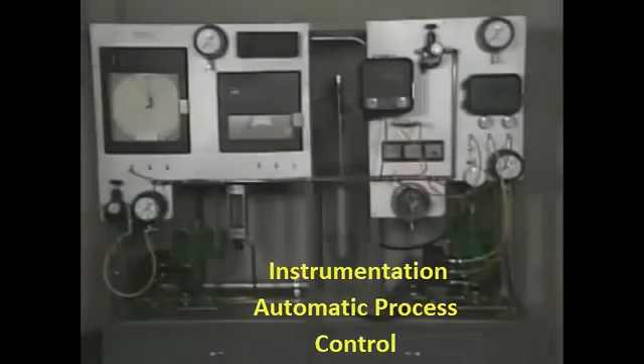In an automatic control system, a controller initiates a corrective action based on the difference between the signal it receives and the set point for a controlled variable. The various types of corrective actions that controllers can provide are called control modes.

With two-position control, a signal from a controller causes a final control element to move from one extreme to another, such as from on to off, or from fully opened to fully closed.

To see how two-position control works, let's look at an illustration of a sump pump arrangement. In this system, a pump draws water out of a pit or sump. A float with a rod is the sensing element in the system. The float rod has two collars, which serve as stops for a linkage that connects the rod to a switch. It's part of an electrical circuit that starts and stops the sump pump motor.

If the level in the sump rises, the float also rises, and the lower collar on the float rod pushes up the linkage to turn the switch on. This starts the sump pump motor. As the pump draws water out, the level in the sump drops, and the float moves down. When the water reaches the minimum level, the upper collar pulls down on the switch linkage, shutting off the pump motor. Now, in a two-position control system, a certain amount of change can occur in the process without causing a control system response.

This amount of change is called the dead zone. The dead zone in this system is controlled by the positions of the two float rod collars. The dead zone can be reduced by moving the two collars closer together. A smaller change in level will then turn the pump on or off. But even though the water will be maintained at a more constant level, the pump will turn on and off more frequently, and this overuse could damage the system's components.

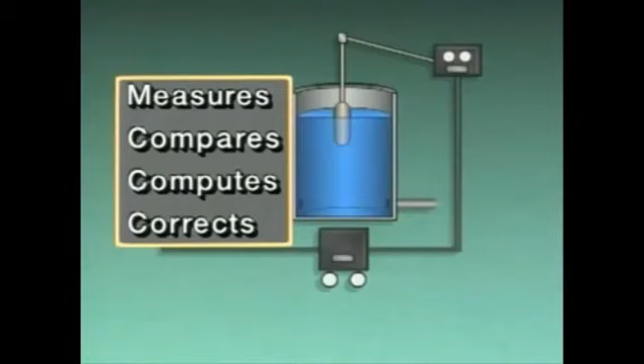The controller measures the signal, compares the signal to set point, computes the difference between the two values, and produces a corrective output signal that's proportional to the input signal. The controller sends that signal to the final control element in the system, a control valve.

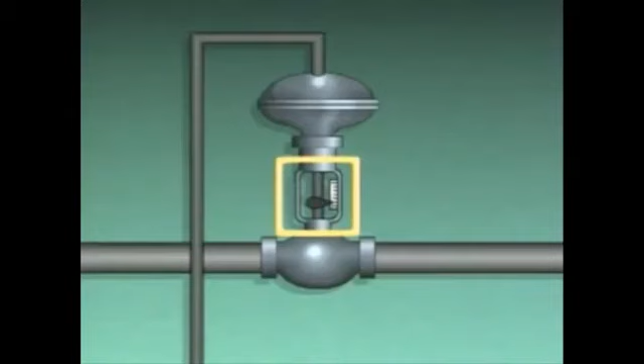The control valve responds by closing down to decrease the flow of water to the tank. However, because of process characteristics such as resistance, capacitance, and dead time, the level fluctuates before it finally returns to set point. We can tell more about how the temporary change in water level affected the system if we plot the control signals on a graph.

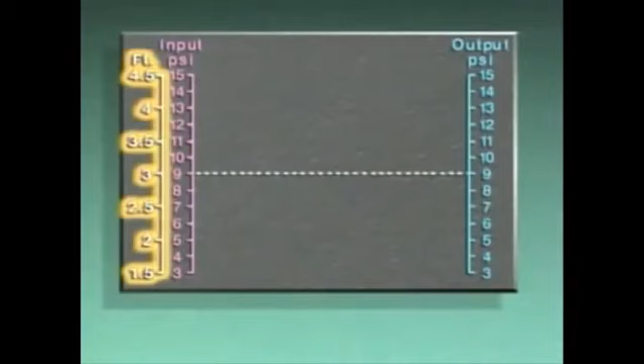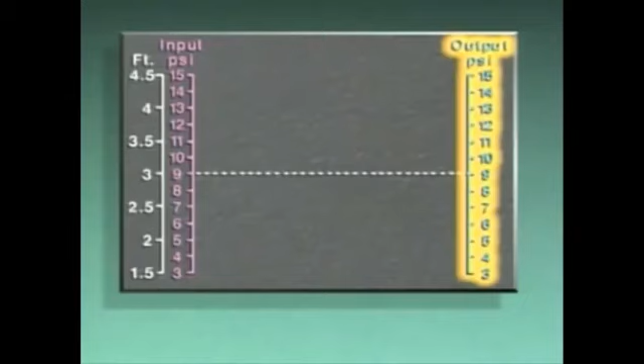On the graph, the scale on the far left is marked off in feet to indicate the water level in the tank. The next scale indicates the value of the input signal to the controller in pounds per square inch, or PSI. The scale on the right indicates the value of the output signal from the controller. It, too, is in pounds per square inch.

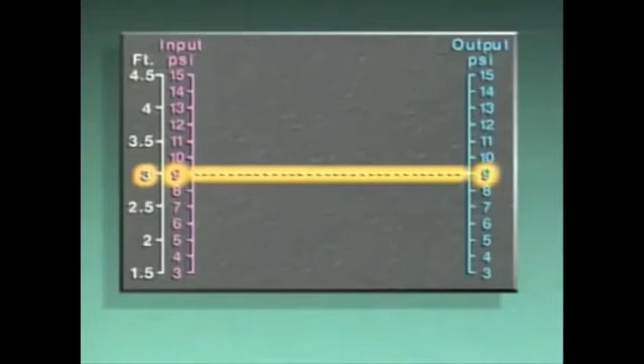As the level in the tank fell, the input and output signals decreased accordingly. However, the process characteristics that we mentioned caused the signals to go through several fluctuations or cycles before returning to set point. With a temporary disturbance, process conditions return to their original state. So a proportional control system can normally return the controlled variable to set point.

But if a continual disturbance occurs, a proportional controller may not be able to restore original conditions. For example, this graph shows the input and output signals when an ongoing decrease in demand caused the level in the tank to rise.

In this example, the control system brought the process back under control. But when it did, the level stayed higher than the original set point. That's because the input signal to the controller increased, then stayed high because of the continual disturbance. As a result, the proportional output signal stayed high as well.

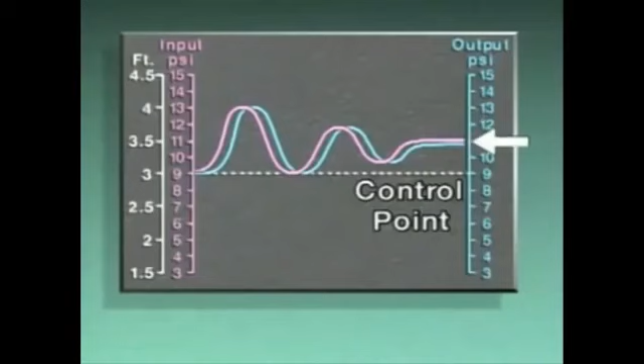The higher steady-state value that resulted, that is, the higher level that's represented by the input signal, is called the control point. The difference between the variable's control point and its original set point is called offset. Offset occurs because a proportional controller produces only enough output to bring a process back under control during a continual disturbance. It may not produce enough output to overcome the disturbance and return the process variable to its original set point. In some processes, a proportional controller may not return a process variable to its original set point. In other words, the controller's action may result in offset.

However, a controller adjustment can sometimes be made to change the amount of offset. This adjustment affects what is known as the proportional band, or PB. Proportional band is the amount of output change, or delta output, in relation to a given amount of input change, or delta input.

The proportional band value is usually multiplied by 100% so that it can be expressed as a percentage. When a controller's input change and output change are equal, the relationship between the signals is 1-to-1, and the proportional band is 100%. This condition is called a 100% PB. The input and output signals on this graph show a 100% proportional band.

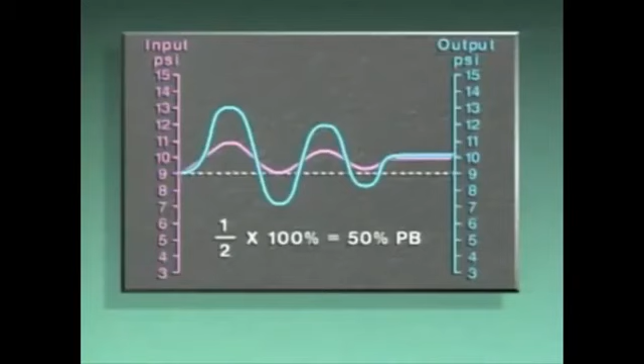Now, the signals on this graph show a proportional band that's less than 100%, otherwise known as a narrow proportional band. With a narrow proportional band, a small change in input to the controller produces a larger change in output. This relationship is equivalent to a 50% proportional band, since 1/2 times 100% equals 50%.

With a narrow proportional band, control action is rapid, and the value of the controlled variable stays closer to set point. However, decreasing a proportional band setting increases the amount of cycling, which can overwork system components.

Now, the signals on this graph show a proportional band that's greater than 100%. This type of proportional band is called a wide proportional band. With a wide proportional band, a large change in input to the controller produces a smaller change in output. The proportional band for this example is 200%.

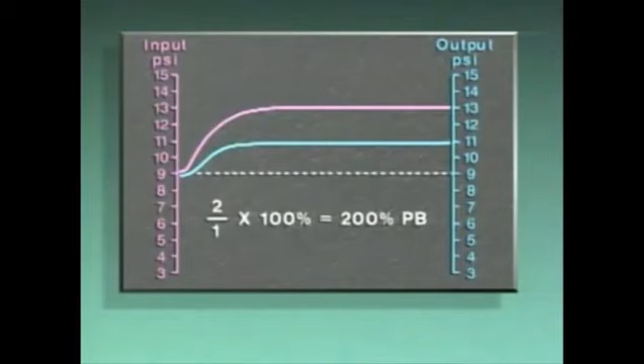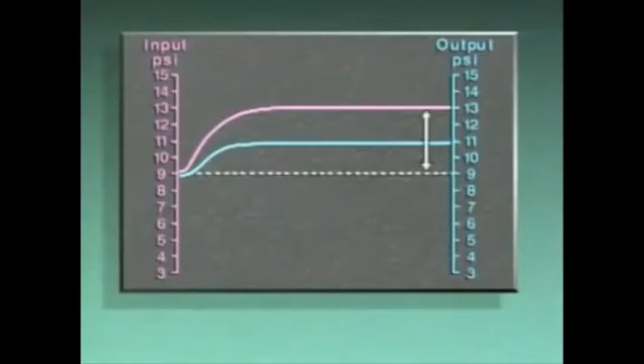Since the output signal changes less than the input signal, a wide proportional band can minimize the amount of cycling in a system. However, there's more offset with a wide proportional band.

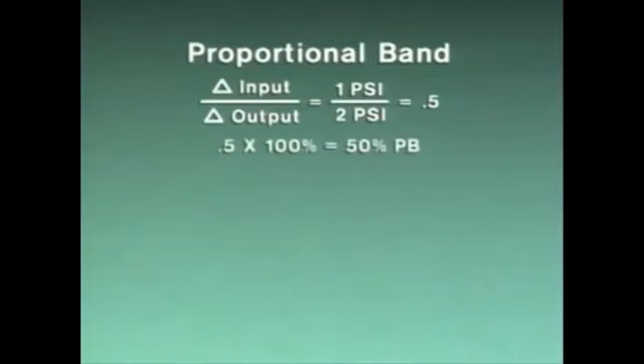Some manufacturers use the term gain when describing a proportional control adjustment. Gain is the inverse of proportional band, and it's expressed as a quantity rather than as a percent value. For example, a 1 psi change in input that produces a 2 psi change in output represents a 50% proportional band. But since gain is the inverse of proportional band, the relationship between the change in input and output is reversed. So the gain in this example is 2.

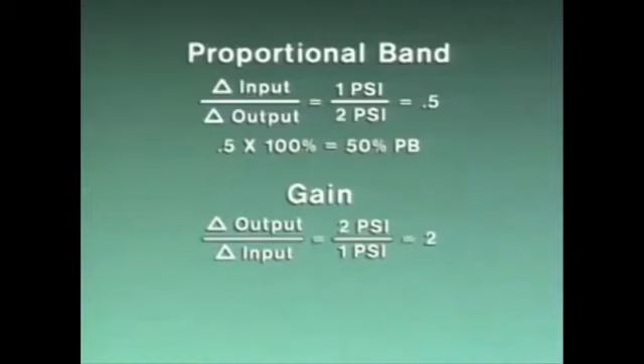In this topic, we examined two-position control and proportional control, and we looked at how those control modes work in an automatic control system. Now let's try some practice questions.

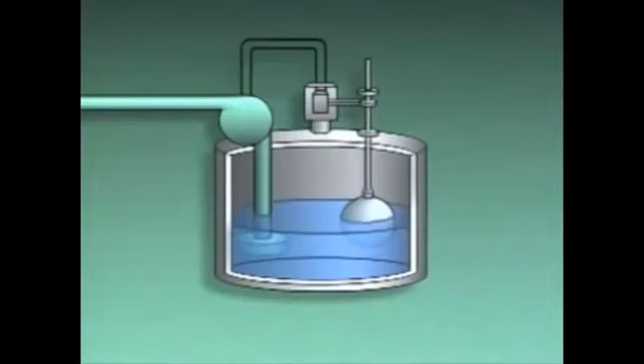Now, in a two-position control system, a certain amount of change can occur in the process without causing a control system response. This amount of change is called the dead zone.

However, reset control is designed to adjust the output of a proportional controller to help eliminate offset and restore original process conditions. Reset action responds to a controlled variable's deviation from set point by increasing or repeating the amount of proportional control until the variable returns to set point.

Reset control doesn't exist without proportional control. In fact, it's actually proportional plus reset control, since it adds an additional corrective action to the proportional action. Also, reset control is sometimes called proportional plus integral, or PI control, because it's based on a mathematical function called integration. In any case, it's easier to understand how reset control works by looking at an example.

In this arrangement, an automatic control system is used to maintain the level of water in a tank. The input signal from the transmitter to the controller represents the level of water. The output from the controller adjusts a control valve in the supply line to the tank.

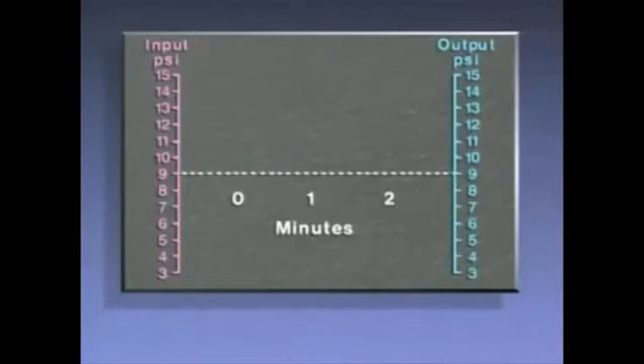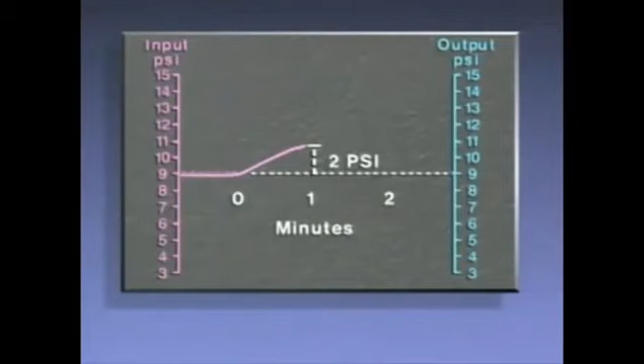During the first minute, the increase in water level caused the input signal to the controller to increase from 9 psi to 11 psi, a change of 2 psi. During the same 1-minute interval, a proportional-only controller with a 100% proportional band would have produced an output signal that matched the input signal. But the output signal from this controller includes proportional action plus reset action, and it increased to 13 psi, a change of 4 psi.

This means the reset part of the control action increased or repeated the 2 psi proportional action one time in 1 minute. This is sometimes described as 1 minute per repeat, or 1 MPR.

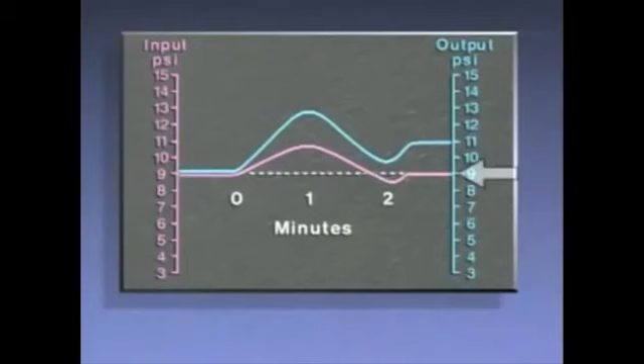As the level of water in the tank rose, both signals increased, then fluctuated briefly before returning to steady state. That's because the value of the controlled variable, represented by the input signal, returned to its original set point of 9 psi. In our example, a reset control action of 1 minute per repeat was able to return the controlled variable to set point.

Often the amount of reset in a system can be adjusted. However, a reset that's too fast can cause a controller to overcorrect and cause the process variable to cycle out of control. In those cases, a slower reset may be needed.

Rate control is a control feature that responds to the speed at which a variable deviates from set point. The faster the variable changes, the greater the amount of rate control action. Rate control is normally combined with proportional control, so it's often called proportional plus rate control. It's also sometimes called proportional plus derivative, or PD control.

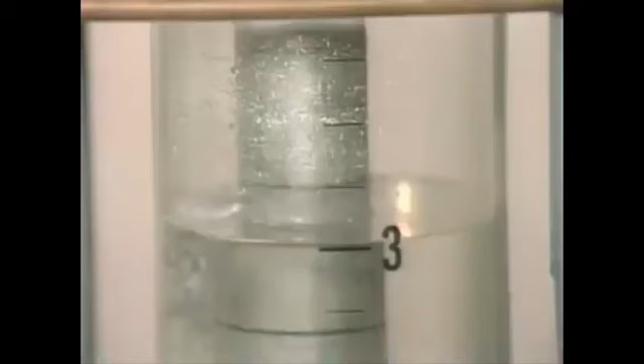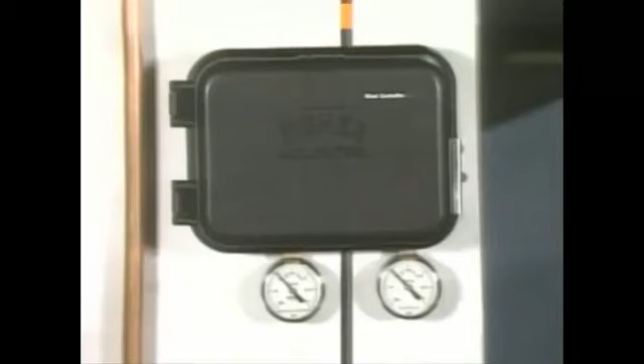When a process disturbance causes the input signal to a rate controller to change, the controller measures the speed or rate at which the input is changing and produces an instant boost to the proportional output signal. In effect, this action tries to stop changes in the input as soon as they're detected.

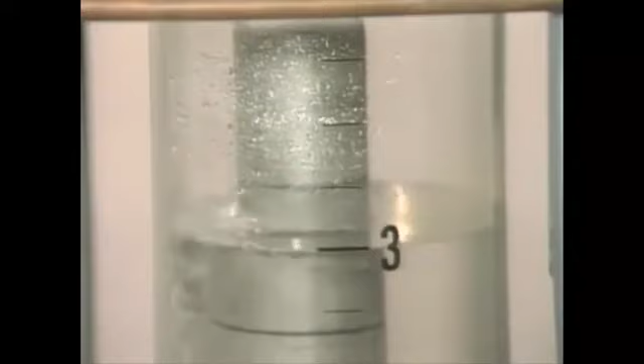To get a better understanding of rate control, we'll use this automatic level control system in which rate control has been added to a proportional controller. We'll say that a continual disturbance causes a decrease in the flow of water from the tank, which in turn causes the level in the tank to rise.

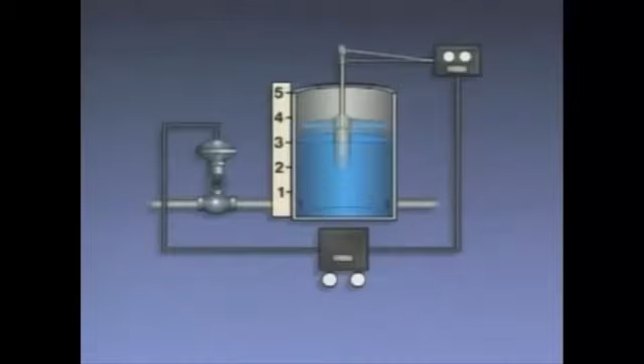If we look at a graph of the control signals from the process, we see that the rate controller responds to the disturbance by producing an immediate boost in output. This boost minimizes the water level's deviation from set point.

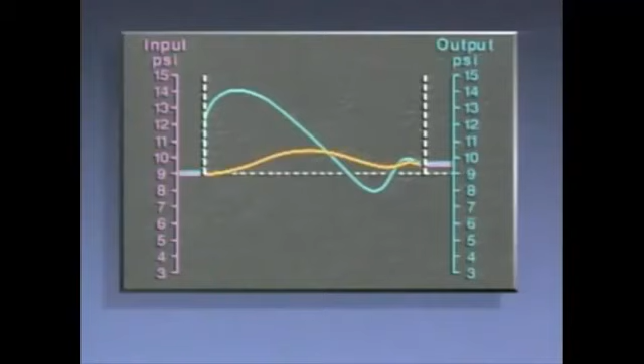Then, a combination of rate control and proportional control stops the water level from changing and brings it down almost to set point. However, because rate control responds only during changes in the input, and because proportional control only provides a proportional output, there may be some offset in the process variable.

In other words, as long as the level is at steady state, even with offset, the rate controller will not provide a correcting output.

When a process requires a rapid control action that eliminates offset, a control mode known as proportional plus reset plus rate control may be used. It combines the precise response action of reset control with the fast response action of rate control.

Proportional plus reset plus rate control is sometimes called PID control: P for proportional, I for integral, which is the same as reset, and D for derivative, which is the same as rate.

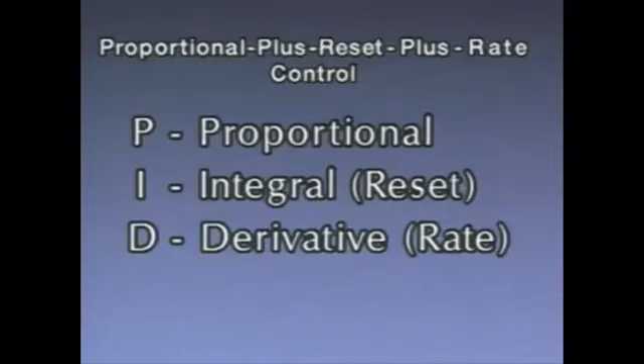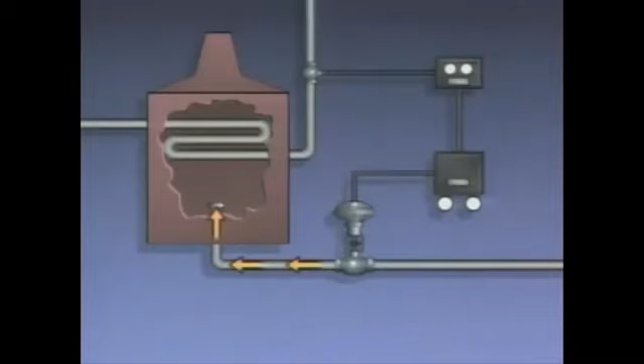One example of a process that requires PID control is the gas-fired oil heating furnace represented here. During operation, oil flows through a pipe in the furnace combustion chamber. Gas flows through a valve in another pipe to a burner. As the gas burns, part of the heat that's produced is transferred through the pipe to the oil.

The controlled variable is the temperature of the oil leaving the furnace. A sensing device in the oil pipe provides oil temperature readings to a temperature transmitter. The transmitter measures the temperature and provides a corresponding pneumatic signal to a controller. The controller uses that information to produce an output signal, which adjusts the control valve to regulate the furnace flame.

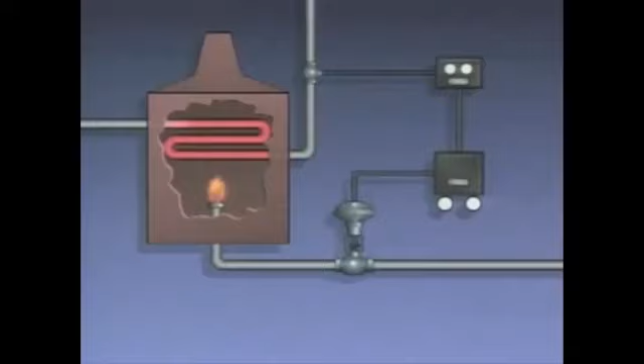Since the flow of oil through the pipe is reduced, there's more time for the oil to absorb heat, and its temperature increases. The control system responds by sending a larger signal to close down the control valve. This reduces the gas flow to the burner and decreases the amount of flame. As a result, less heat is transferred to the oil, and the oil temperature returns to set point.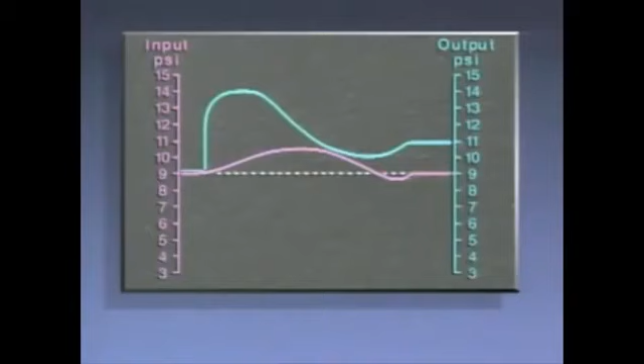We can get a better idea of how the control system responded to the change in oil temperature by looking at the controller's input and output signals on this graph.

The input signal to the controller represents the oil temperature. As the graph shows, when the temperature of the oil first began to increase, the controller immediately produced a corrective output signal that reflected the rate of change. This boost of control action stopped the temperature from changing as rapidly as it would have without rate action.

As the rate portion of the controller output worked to stabilize the oil temperature, the reset portion of the output worked to return the oil temperature to set point. Soon, the combination of reset and rate control returned the oil temperature to steady state at its original set point. The final output signal also returned to steady state, but at a higher value. The higher output closed the control valve to a new setting to maintain the oil temperature at set point.

In this topic, we described how reset control, rate control, and a combination of the two work in an automatic control system. Now let's try some practice questions.

Not all control modes can return a controlled variable to set point after a process disturbance. However, reset control is designed to adjust the output of a proportional controller to help eliminate offset and restore original process conditions. Rate control is a control feature that responds to the speed at which a variable deviates from set point. The faster the variable changes, the greater the amount of rate control action.

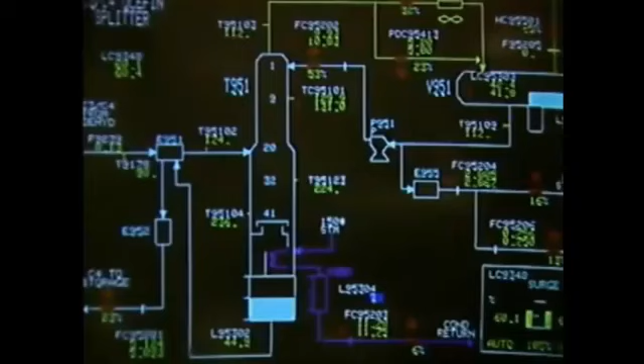In process systems, physical conditions such as pressure, temperature, level, and flow are subject to change. These changeable conditions are called process variables. To help maintain the efficiency of a process, the values of these variables are often controlled by automatic process control systems. Part of an operator's responsibility is to use these control systems and understand how they work.

Many plant processes are monitored and regulated by some type of process control system. A process control system monitors the value of a process variable and provides actions that control the value of the variable. Two basic types of process control are manual control and automatic control.

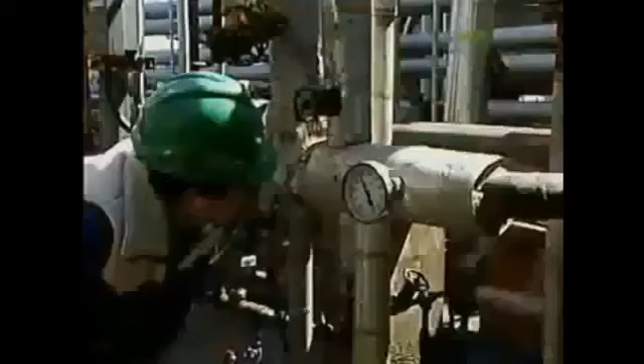With manual control, an operator monitors the value of a process variable and then manually makes whatever adjustments are necessary to control the process. Automatic control is basically a form of control that's performed with little or no human intervention.

To get a better understanding of how an automatic control system works, we'll use this simplified illustration of a system that's used to control the level of water in a tank.

Since the level of the water is what's maintained at a desired value, it can be thought of as the controlled variable in the system. It can also be thought of as the measured variable, because the control system uses it as a basis for making operating changes. The level of the water will remain constant as long as the flow of water into the tank

equals the flow of water out of the tank. In this system, the water level is controlled by regulating the flow of water into the tank. For that reason, the flow of water into the tank is called the manipulated variable.

As with all automatic control systems, this system has four basic parts or elements. One element, the primary element, is a sensing device that's located where the process variable is monitored. In this system, the primary element is a float that senses the level of water in the tank.

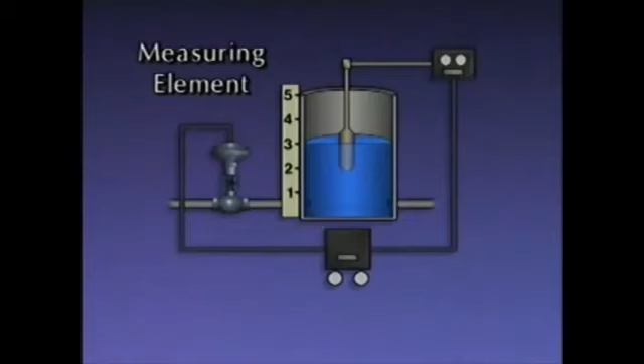The float is connected through a mechanical linkage to the second element in the system, a measuring element. In this system, the measuring element is a transmitter. The transmitter detects the position of the float and transmits a signal representing the level in the tank to the third element in the system, a controlling element.

The controlling element, or controller, measures the signal from the transmitter, compares the signal to the desired level setting, computes any difference between the two values, and if necessary, produces a corrective signal. The controller sends the corrective signal to the final control element, which in this case is a control valve. The control valve adjusts the flow of water to the tank as needed to keep the level at the desired setting.

When a process is operating normally, the variables for that process will be at or near their desired values. The desired value of a process variable is known as the set point. For example, the set point for the water level in this system is 3 feet.

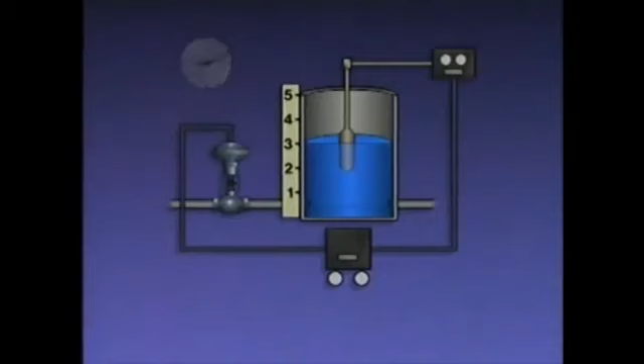When the values of the process variables in a system remain relatively constant over a period of time, the system is said to be operating under steady-state conditions. Most control systems will allow slight variations in the values of process variables. But if the value of a variable changes significantly from its set point, corrective action may be needed to return the process to its original operating conditions.

To see how a process disturbance can affect a control system, let's look at the automatic level control system we saw earlier. In this example, a process disturbance causes a decrease in the demand for water from the tank. The decrease in demand causes the level of water and the float to rise. In this case, the water level rises to 4 feet.

The movement of the float is transferred through the mechanical linkage to the transmitter. The transmitter then sends a signal that's proportional to the increased water level to the controller. When the controller receives the signal, it measures the signal, compares the measured value to set point, and computes the difference between the two values.

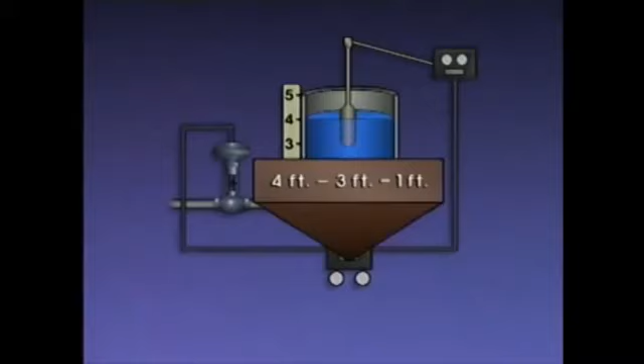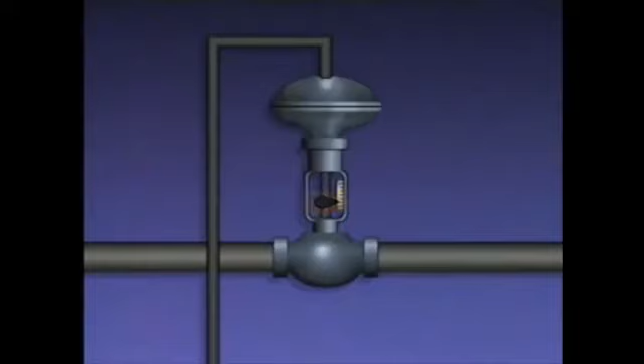The controller then sends a corrective signal to the control valve. The control valve responds to the signal from the controller by closing to reduce the flow of water to the tank. This compensates for the decrease in demand that caused the water level to rise. As a result, the level returns to its original set point value of 3 feet.

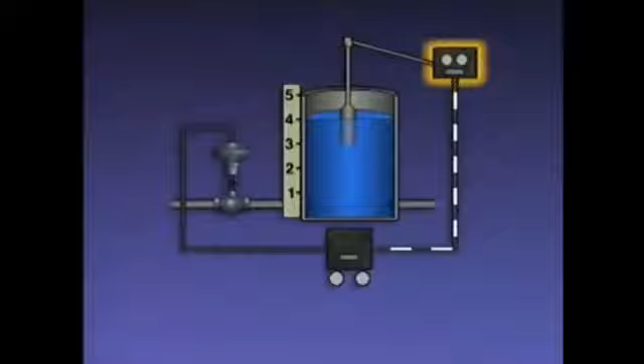The transmitter is the measuring element in this system. It detects the position of the float and transmits a signal representing the level to the controlling element. One of the basic methods of control used by automatic process control systems is feedback control. In a feedback control system, a control action is initiated after the controlled variable has deviated from set point.

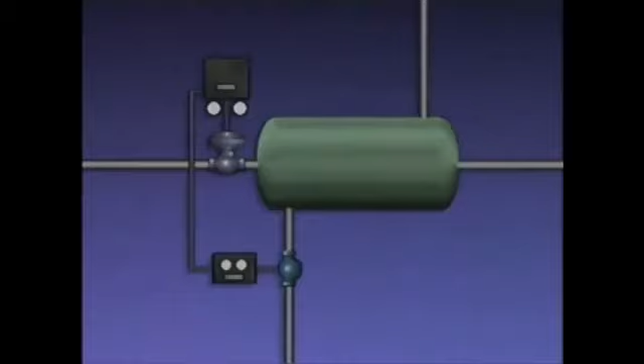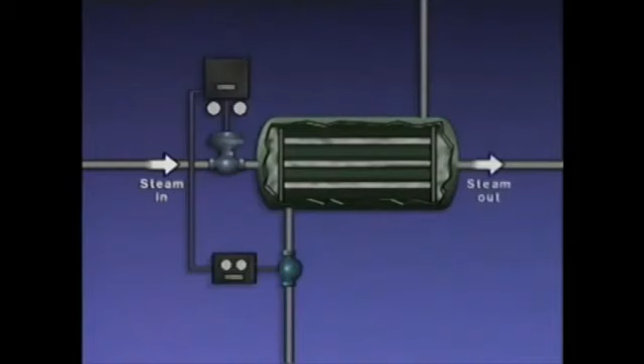To see how an automatic feedback control system works, we'll use this illustration of a heat exchange process. In this system, steam is used to heat water. The steam enters the system through a valve, then flows through tubes inside the heater, and exits the heater through a pipe on the other side.

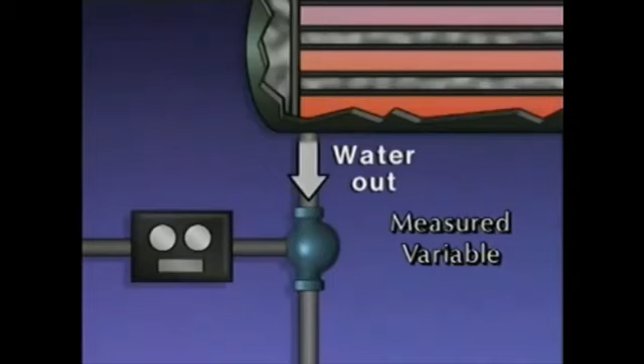The steam transfers heat to the water, which enters the heater at the top, flows around the tubes, and exits the heater at the bottom. The temperature of the water at the outlet of the heater is the controlled variable for the system. It's also the measured variable, because the control system uses it as a basis for making operating changes.

The manipulated variable in this system is the inlet steam flow, that is, the steam flow to the heater. It's adjusted to keep the outlet water temperature at set point. The primary element in this feedback control system is a temperature sensing device in the outlet water line. More specifically, the device is a temperature sensing bulb, which contains a gas.

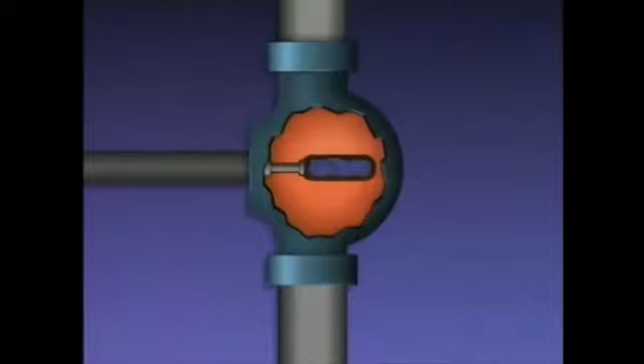If the temperature of the water leaving the heater increases, the gas in the bulb expands. This causes a pressure increase that's carried along the tubing connecting the bulb to a temperature transmitter. The transmitter sends a pneumatic signal that's proportional to the water temperature to a controller. The controller measures the signal and compares it to set point. This is how the controller detects that the temperature of the water has increased.

The controller then computes the difference between the temperature of the water and set point and sends a corrective signal to the final control element in the system, which is the control valve. The control valve responds to the signal from the controller by closing to reduce the amount of steam flow to the heater. As a result, less heat transfer takes place in the heater, and the outlet water temperature returns to set point.

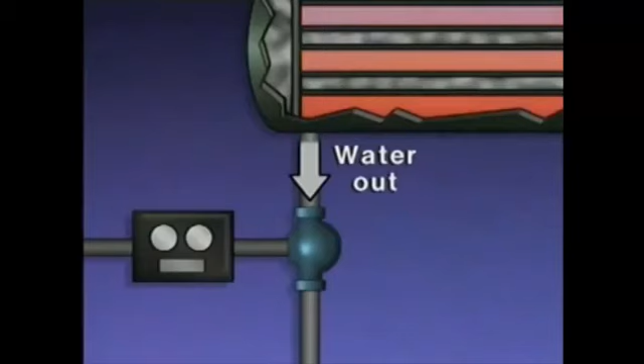A feed-forward control system attempts to correct for a process disturbance before the controlled variable in the process deviates from set point. To get a better understanding of how a feed-forward control system works, let's look at an illustration of a heat exchange process that's controlled by a feed-forward system.

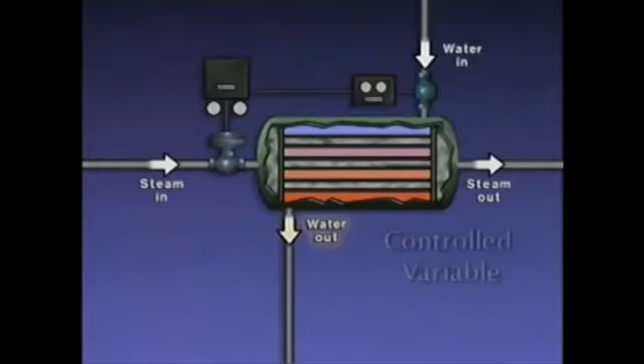In this system, steam flows through tubes inside a heater and heats water that flows around the tubes. The controlled variable in the system is the water temperature at the outlet of the heater. The inlet water temperature is used to determine whether a control action is needed to maintain the outlet water temperature, so it's the measured variable in the system.

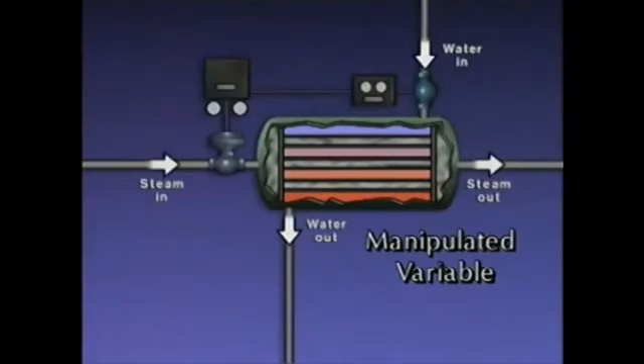The manipulated variable, that is, the variable that's adjusted to maintain the outlet water temperature, is the steam flow into the heater. The feed-forward control system works like this: if the temperature of the water entering the heater changes, the primary element in the system, in this case a temperature-sensing bulb, detects the change in temperature and changes the signal that it sends to a transmitter.

The transmitter measures the signal from the temperature-sensing bulb and sends a proportional signal to a controller. The controller measures the signal from the transmitter and compares it to set point. If there's a difference between the two values, the controller sends a signal to the final control element in the system, the control valve. The control valve responds by opening or closing to change the amount of steam flow to the heater.

If the temperature of the water flowing to the heater decreases, the control system opens the control valve to increase the steam flow to the heater.

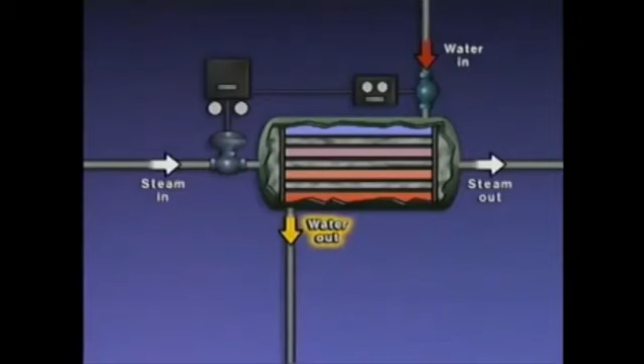This provides more heat for transfer to the water and prevents the outlet water temperature from dropping below its desired value. Now, if the temperature of the water entering the heater increases, the control system closes the control valve to allow less steam to enter the heater.

As a result, less heat is transferred to the water, and the outlet water temperature is kept from rising above its desired value. A feed-forward control system can be effective at correcting for certain process disturbances before the disturbance affects the controlled variable in the process. However, there are many possible disturbances in a process, and a typical feed-forward control system may not be able to respond to every one of them.

For example, the feed-forward control system that we just looked at responds only to changes in the temperature of the water entering the heater. Other disturbances, such as a change in the pressure or temperature of the steam entering the heater, can also affect the outlet water temperature, but those disturbances will go unnoticed by the feed-forward control system.

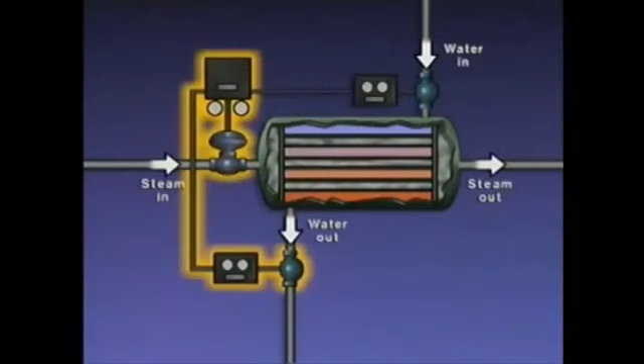To correct for those types of disturbances, a combination of feedback and feed-forward control could be used. With combined control, the feed-forward part of the system responds to changes in the inlet water temperature, while the feedback part responds to changes in the outlet water temperature caused by other disturbances. By combining the features of feedback and feed-forward control, greater control over disturbances upstream of the process and within the process can be attained.

In this topic, we saw how the four elements of an automatic control system work together to control a process, and how a control system responds to a process disturbance. We also saw how feedback control, feed-forward control, and a combination of the two methods work to control a process. Now let's try some practice questions related to this material.

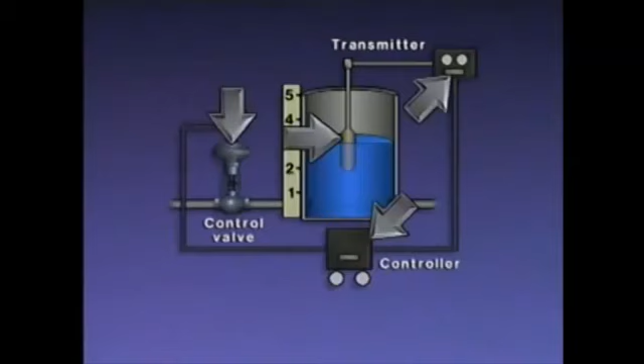Right. The controlling element, or controller, computes the difference between the measured level and set point, and sends a corrective signal to the final control element.

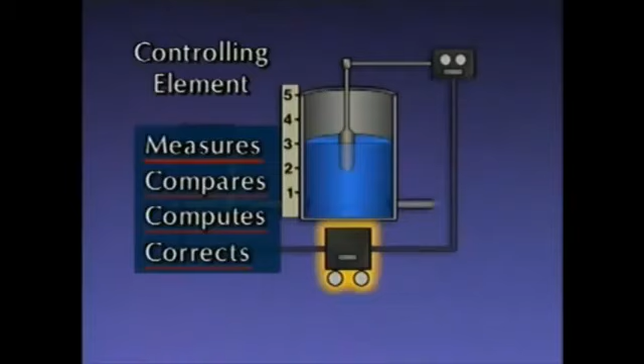The controlling element, or controller, measures the signal from the transmitter, compares the signal to the desired level setting, computes any difference between the two values, and if necessary, produces a corrective signal. The controller sends the corrective signal to the final control element, which in this case is a control valve.

One of the basic methods of control used by automatic process control systems is feedback control. In a feedback control system, a control action is initiated after the controlled variable has deviated. A feed-forward control system attempts to correct for a process disturbance before the controlled variable in the process deviates from set point.

All processes have characteristics that can affect how a control system responds to operating changes. Two of the more important of these characteristics are resistance and capacitance. Resistance can be thought of as an opposition to flow. Capacitance can be thought of as the ability to store energy.

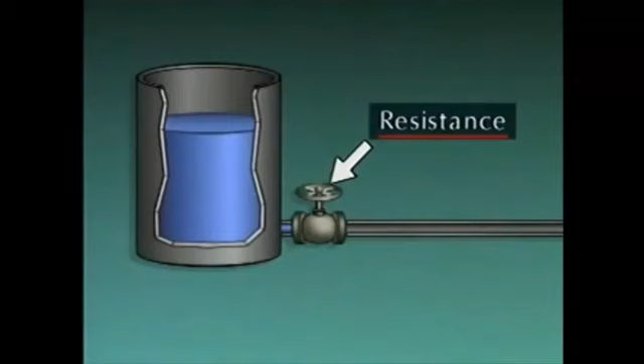While these terms are commonly used in describing electrical circuits, they can also be applied to process systems that contain fluids. For example, in this system, the resistance is caused primarily by a valve that opposes the flow of liquid from a container. The system's capacitance, or ability to store energy, is determined by the size of the container.

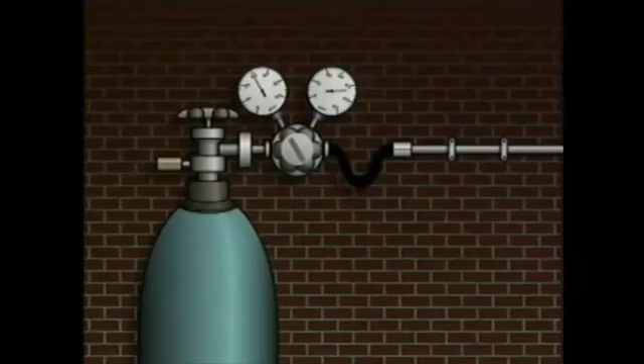These same characteristics can also be applied to gas or vapor systems. For example, in this system, the resistance is caused primarily by a valve that opposes the flow of gas from a pressurized cylinder. The capacitance depends on the storage capacity of the cylinder.

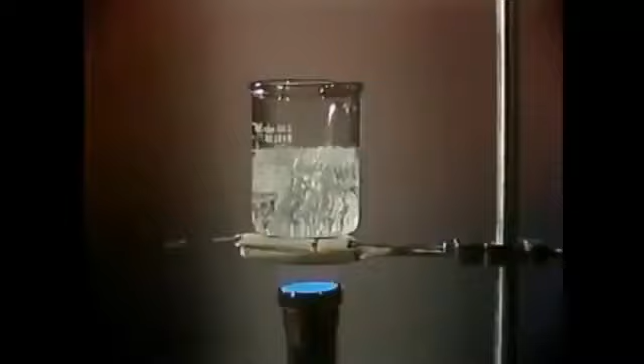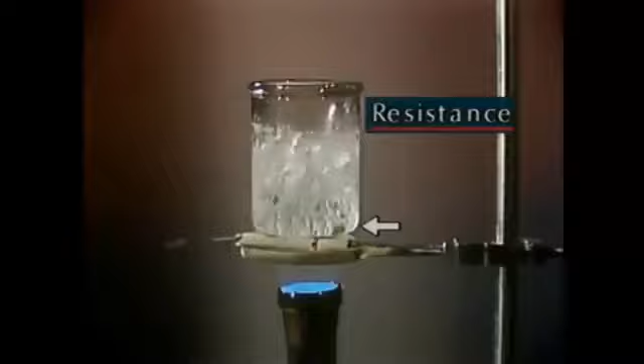Now, in a thermal process, that is, one involving heat, resistance and capacitance may be somewhat different. Here, a flame is used to heat a beaker of liquid. In this arrangement, the wall of the beaker represents the resistance, since it resists the transfer of heat from the flame to the liquid. The amount of heat or thermal energy that the liquid is able to store represents the capacitance of the system.

Process characteristics such as resistance and capacitance can affect how a control system responds to process disturbances. We can get a better understanding of how these characteristics can affect a system by looking at an illustration of a simple heat exchange process. In this system, steam flows through tubes in a heater and heats water that flows around the tubes.

At the moment, the temperature of the steam entering the heater is 400 degrees Fahrenheit, and the temperature of the water leaving the heater is 200 degrees Fahrenheit. Now, suppose a process disturbance causes the temperature of the steam to suddenly rise to 500 degrees. What do you suppose will happen to the temperature of the water?

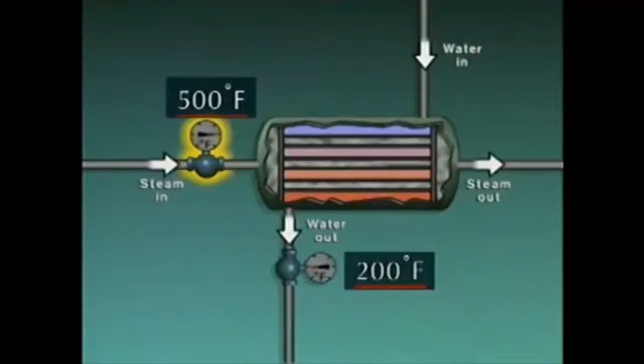Even though the steam temperature increased suddenly, the water temperature will remain unchanged briefly, then increase slowly. It's easier to see how the water temperature changes by plotting the temperature changes on a graph.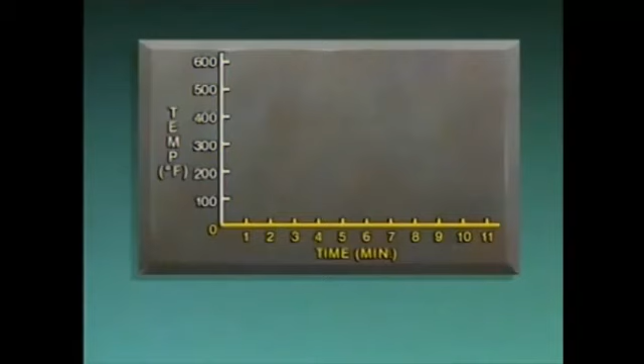On the graph, the vertical axis represents temperature, and the horizontal axis represents time. When we plot the steam temperature, we see the sudden increase from 400 degrees to 500 degrees.

This type of disturbance is commonly called a step input or a step change. When we plot the water temperature, we see that there's a delay between when the steam temperature increased and when the water temperature first started to rise.

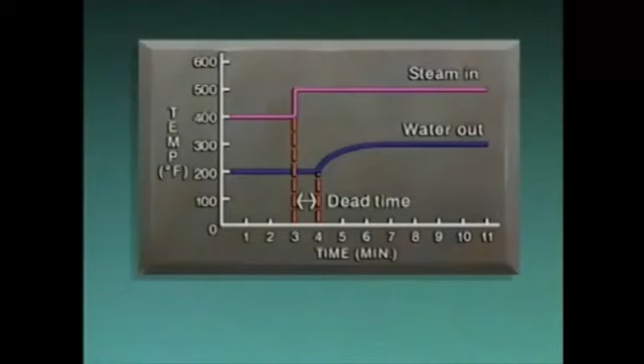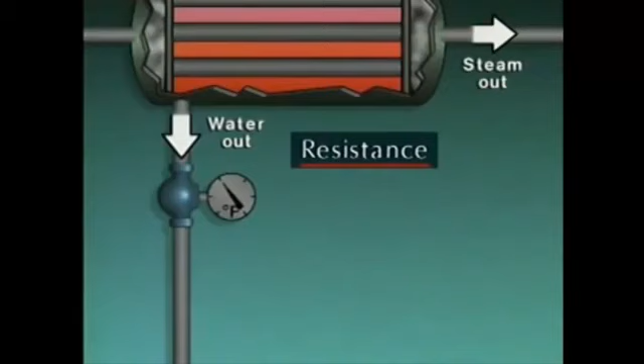This delay is called dead time. It can be thought of as the amount of time required to transfer energy from one point to another. In the heater, the transfer of heat from the steam to the water was delayed because of resistance to heat transfer through the tubes, and because of the water's capacitance, or the ability of the water to store heat.

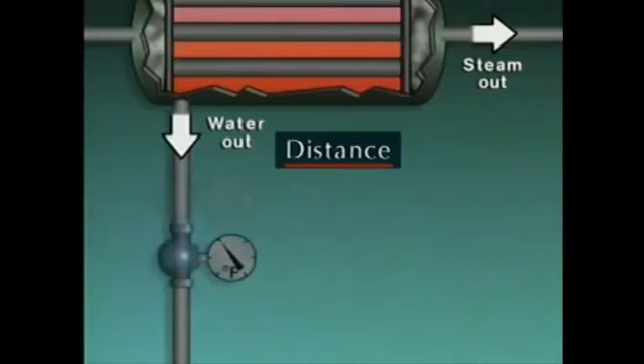Another factor that can contribute to dead time is the distance that the heat has to travel to reach the temperature gauge. In this case, the greater the distance from the heater to the gauge, the greater the dead time.

Looking back at the graph, we see that after the time delay, the water temperature gradually rose to a new value of 300 degrees. The total amount of time that passed from when the steam temperature changed until the water temperature reached its maximum amount of change is called lag time, or lag. Lag is caused by the combined effects of dead time and other process characteristics, such as resistance and capacitance.

In this topic, we focused on certain characteristics of a process that can affect a control system's response to a process disturbance. Now let's try some practice questions that relate to this material.

All processes have characteristics that can affect how a control system responds to operating changes. Two of the more important of these characteristics are resistance and capacitance. Resistance can be thought of as an opposition to flow. Capacitance can be thought of as the ability to store energy.

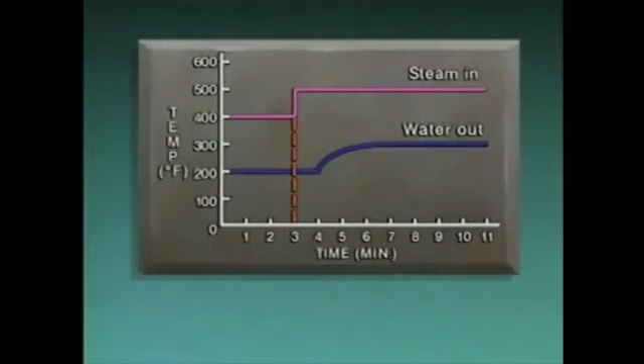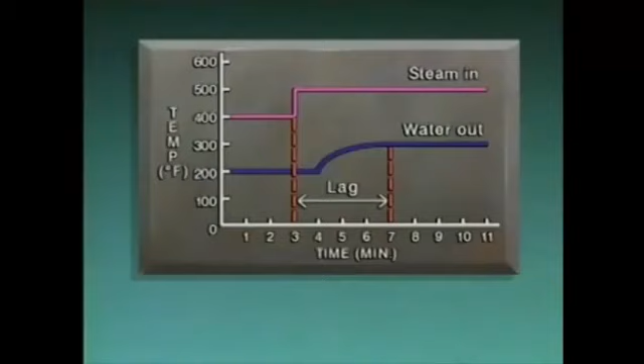While these terms are commonly used in describing electrical circuits, they can also be applied to process systems that contain fluids. The total amount of time that passed from when the steam temperature changed until the water temperature reached its maximum amount of change is called lag time, or lag. Lag is caused by the combined effects of dead time and other process characteristics, such as resistance and capacitance.

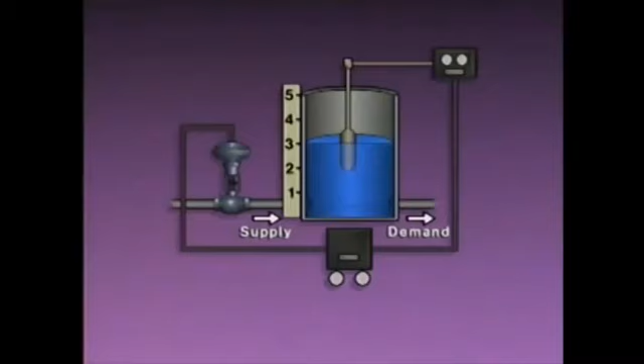In this arrangement, an automatic control system is used to maintain the level of water in a tank. If the level in the tank rises, what is the controller most likely to do?

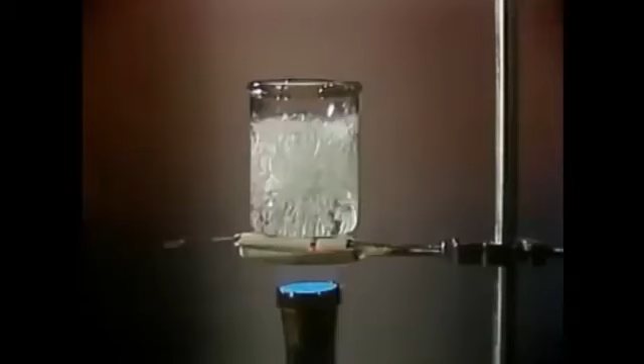In this example of heat transfer, a flame is used to heat a beaker of water.

In this heat exchanger, steam flows through tubes and heats water that flows around the tubes. If the temperature of the steam entering the heater suddenly increases, what will happen to the temperature of the water leaving the heater?

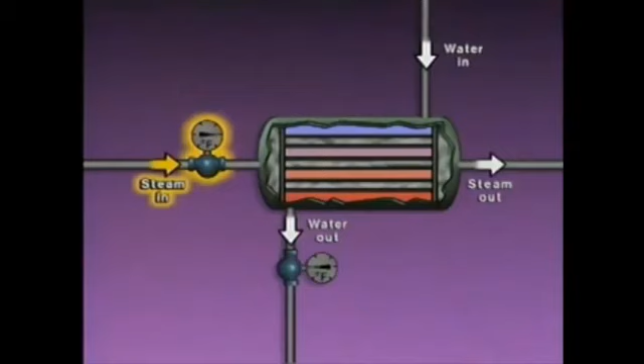In this system, steam flows through tubes inside a heater and heats water that flows around the tubes. If the temperature of the water at the outlet of the heater is the controlled variable for the system, what is the manipulated variable?

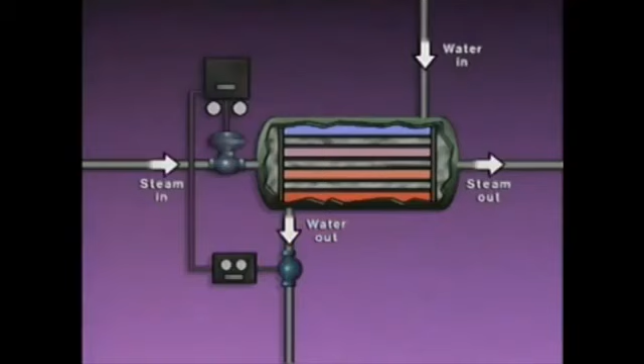This feed-forward control system is used to maintain the temperature of the water flowing out of a heater. Based on the configuration of the system, what variable is adjusted to keep the outlet water temperature at set point?

This feed-forward control system is used to maintain the temperature of the water flowing out of a heater. What will the control system do if the temperature of the steam entering the heater decreases?

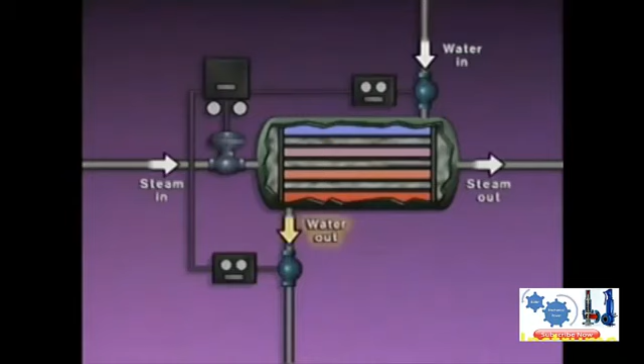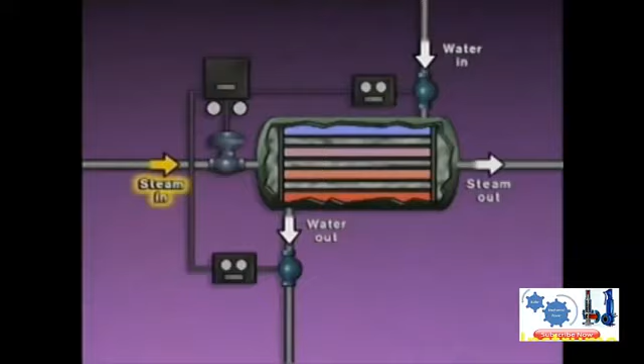In this process, the temperature of the water leaving the heater is controlled by a combined feedback and feed-forward control system. What is most likely to happen if there is an increase in the temperature of the steam entering the heater? In this example of heat transfer, a flame is used to heat a beaker of water.